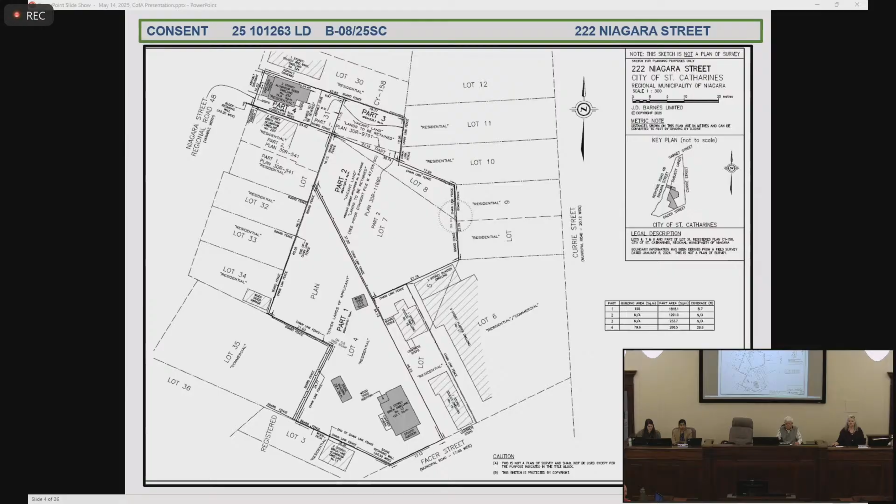The applicant is not present. Are there any questions from the committee? Is there anyone here to speak to this? Could we have a motion, please?

I move that we remove the 2 conditions as presented in the memorandum from file number B0825SC.

All those in favor? Can we just add that it's minor in nature? Just that it's minor change of conditions? Yeah.

And it was unanimous.

We'll move on to our second application, variance application A2725 for 11 Manhattan Court, requesting a reduction of parking spaces for an interior accessory dwelling unit from 0.5 spaces to 0 spaces.

Would the owner or the agent come forward? The owners are Tim and Rose Latanzi. The agent is Nicholas Godfrey from Upper Canada Consultants, and the planner is Dasha Litviniuk.

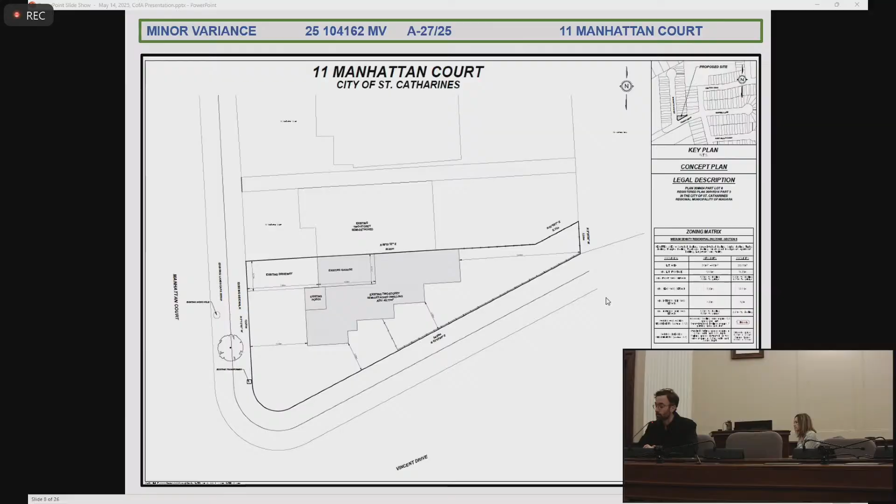Could we have your name and address, please? I'm Nicholas Godfrey. I'm with Upper Canada Consultants at 330 Hanover Drive.

I assume you've reviewed the technical report and are aware of the recommendation to approve. Is there anything you wish to add? Through you, Chair, no, I am in agreement with the report, and that is all. Okay. Any questions from the committee?

Anyone here to speak to this file? Could we have a motion?

Following consideration of all written and oral presentations, I move that variance application A2725 as presented in the notice of hearing be approved as recommended, as the situation is minor in nature and appropriate and desirable for the use of the land and is in keeping with the general intent of the official plan and zoning bylaw.

All those in favor? Dale, are you in favor? That's approved unanimously. Thank you. Thank you.

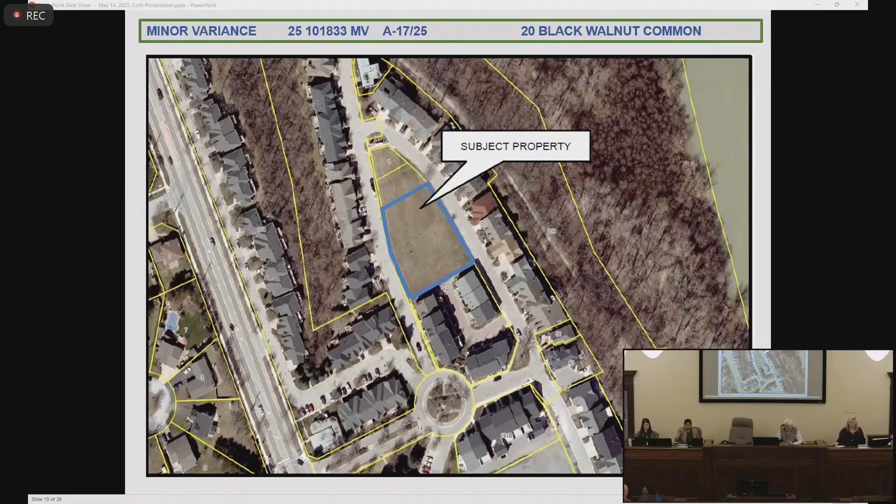We'll move on to the next application, application A1725 for 20 Black Walnut Common. They're requesting permission to build a 15-unit townhouse complex on a private road, when the bylaw states that no person shall develop or construct any building or structure and otherwise use any lot unless the lot fronts on a public road.

Requesting a reduction of required parking spaces for the principal dwelling from 1.75 to 1.25 parking spaces. Requesting an increase in the maximum percentage of unit width for the driveways from 50% to 95%. A reduction of the distance from the front wall of the dwelling to the private street from 2 meters to 1 meter. A reduction of the distance from the rear wall of the dwelling to the private road from 2 meters to 1.2 meters. A reduction of the distance from the garage to the private street from 6 meters to 1.2 meters. An increase in the maximum building height from 10.8 meters to 11 meters, and a reduction in the minimum landscaped open space from 25% to 21%.

I see we have an agent here. Could you give us your name and address?

I'm having a little trouble hearing you, Mr. Chairman. Okay, you want me to present? I'd like your name and address first, please. Could I get your name and address first, please? I beg your pardon? Could I get your name and address, please? Name and address?

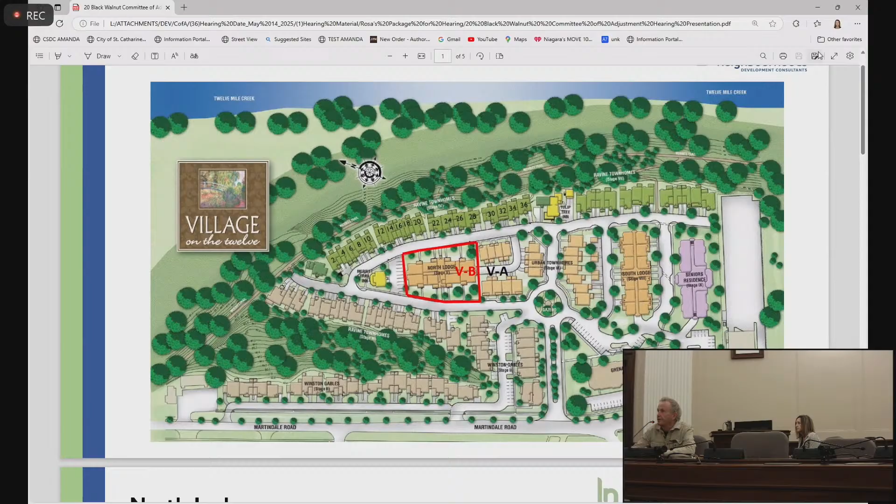What I'm going to do is give a little bit of context. I'm not going to speak a lot, just give a little context, because the staff report is quite complex, but it's complex for different reasons than you might think, okay? I will try to simplify it, if I may.

Just as context for Village on the 12, I'm sure the committee's already been out there. We started this in 1986 when the developer built Grenadier Place. My partner and I bought the rest of this in the late 90s, and we've been developing it ever since according to new urbanist principles. We've gone through stages 2, 3, 4, 5A, 6, and 7 to where we've got it to this point, okay?

Stage 5B, which is the area in red, was zoned for a 30-unit apartment building, a 4-story apartment building, or alternatively for townhouses. It's been like that since 2001. What's happened is, since that time, developments occurred all around it, and now these folks wish to build the 15 townhouses, and of course we're encouraging them to do that. Could I have the next slide, please, Rosa?

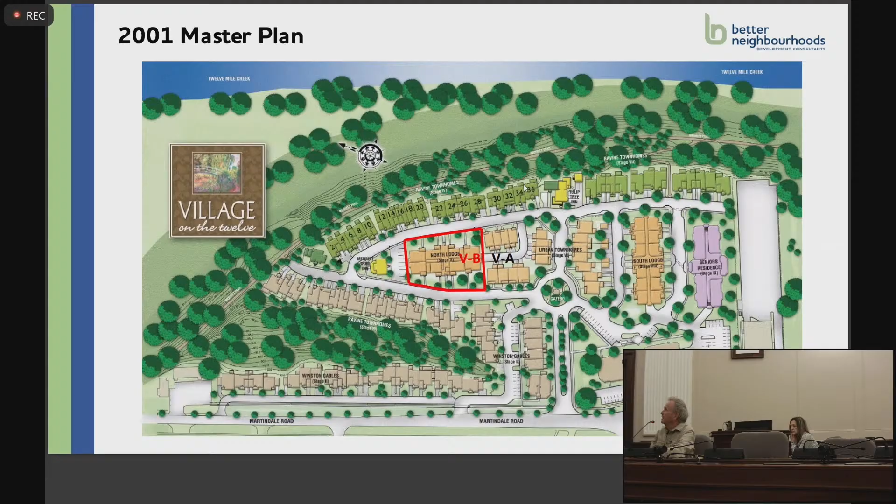This was the apartment building design, the front of it on Black Walnut Common, and it was approved, and there was even a site plan agreement registered. They were ready to build about 18 months ago. Because of the turn of the economy, especially now with the American Revolution affecting things, the option for building apartments is not very good right now. So they've decided to change it to townhouses, and thank goodness back in the early 2000s we had rezoned it for townhouses, so it's all set to go.

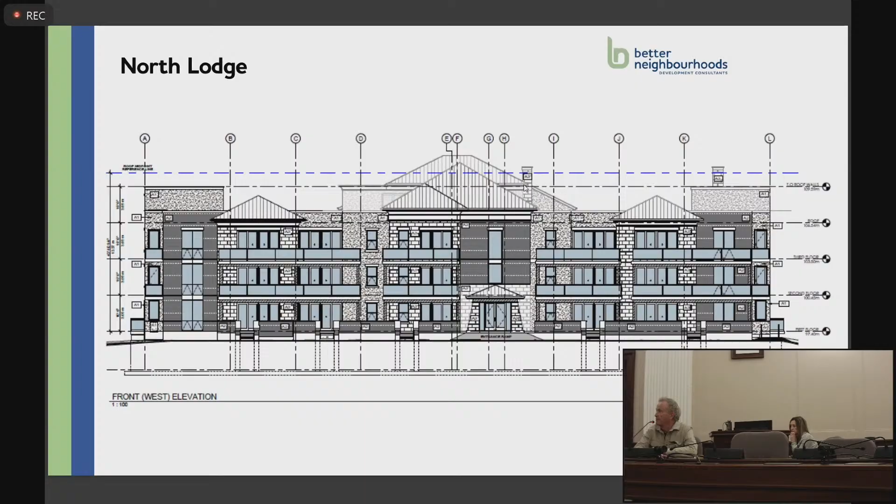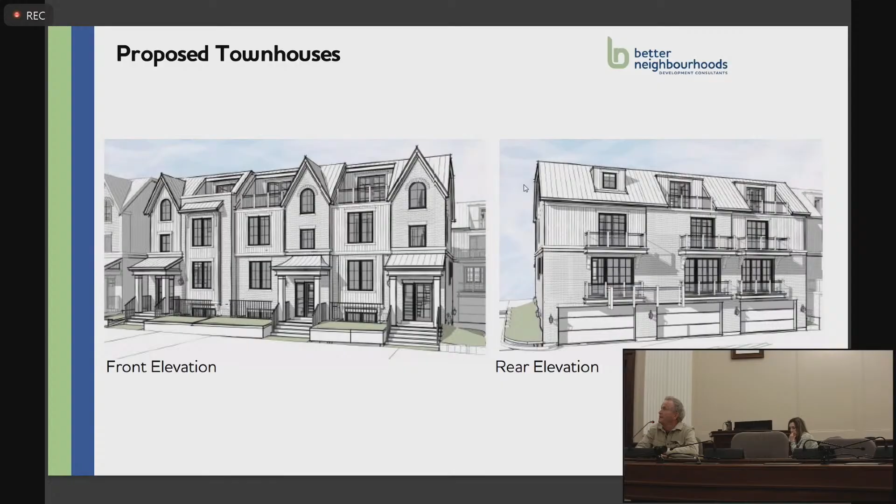Now, if I could have the next slide, please. There we are, the architect's sketches. It was ACK that did the architectural sketches, the front on the left and the rear laneway elevation on the right. ACK, Mike Allen's group, also did stages 6 and 7, the townhouses when you go in on Willowbank Common on the right-hand side and at the back. I'm very happy with their architecture.

So if I could go back to the slide before this, that'll be fine. Okay, so the complication here, the staff report, I think it's about 5 or 6 pages long. And there's a total of 8 minor variances, okay? The reason why this is necessary is that between the time we built the first phase, which is 12 townhouses, and this phase, even though it's the same form, the same nature, roughly the same height, all the setbacks are essentially the same.